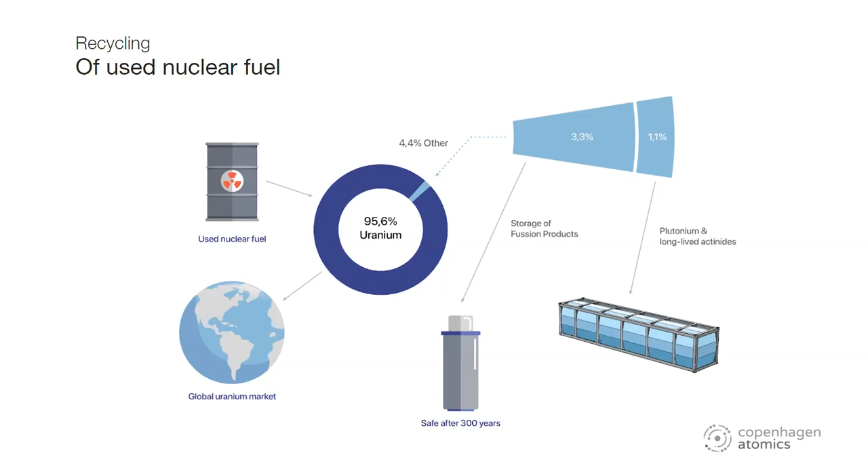Yeah. Good. Peter Smit also had a question. Why has waste from thorium a much shorter life than from a light water reactor? Yeah, so it has to do with this. I'll just go up a little bit here. This chart here. I hope you can still see the slides. This chart here shows the different routes that

when you have neutrons that interact with the atoms in a nuclear reactor, those atoms are converted to other atoms. This is what a nuclear reactor does, whether it's a fusion or a fission reactor. And this particular calculation I showed here is for a thorium reactor. But if you do the same calculation for a reactor based on uranium-235, then over on the very right side there's uranium-238. This is basically the main ingredient in light water reactors. So this whole chart starts over there at uranium-238, and then it goes further out to the right and further downwards. And I haven't included those numbers in this chart because this chart is only about thorium.

But the thing is that when you have these neutrons interact with your uranium-238 and also the subsequent elements that are created from that, you create some of these things, like you can see part of them here. Neptunium is down there, neptunium-238. There's plutonium and there's californium and all these other elements that are not found in nature. And unfortunately, they have a very long half-life. So they are radioactive for tens of thousands or even 100,000 years.

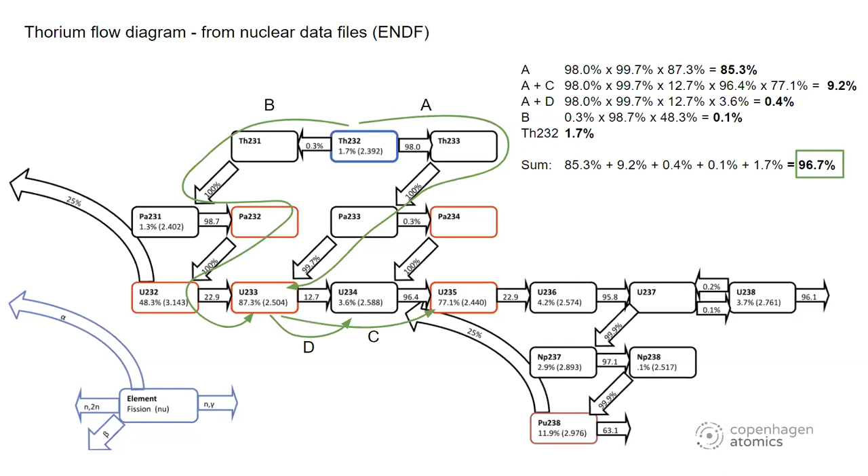One thing I like when I have talked to Thomas Jam, but also others, is if you look at a light water reactor, it takes decades to build now, but when we designed it, if you look in the past, in 3-4 years a light water reactor in the 60s was developed and deployed. So there's also other reasons, I think, but Thomas Jam can very well allude on that.

Yeah, it's completely a question about human perception. It's not really about engineering. Like you said, if we go back to some of the very first reactors that were ever built in this world, one of the first ones is the Hanford B reactor at the Hanford site in the state of Washington in the USA, and it's now a museum. So everybody can go there and have a look. If you're interested in nuclear reactors, it will be a great experience, because that's one of the very first reactors they built.

And they were not able to do any computer simulations back then. Of course, they did some calculations on a blackboard before they built it to know what size it should have. And then they built it, and it took 11 months from when they started digging in the ground till the chain reaction was running. The calculations on the blackboard showed it was probably something like 250 megawatts. They had designed the cooling system for 250 megawatts, but once it was running they could see that they could easily go higher than that.

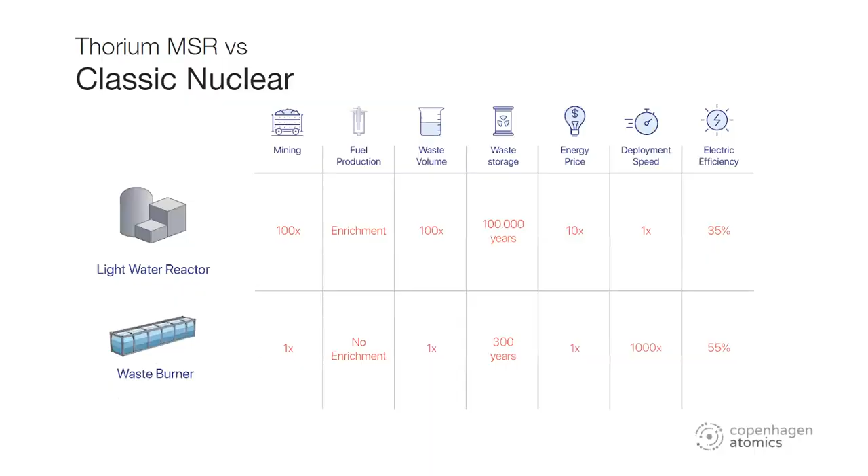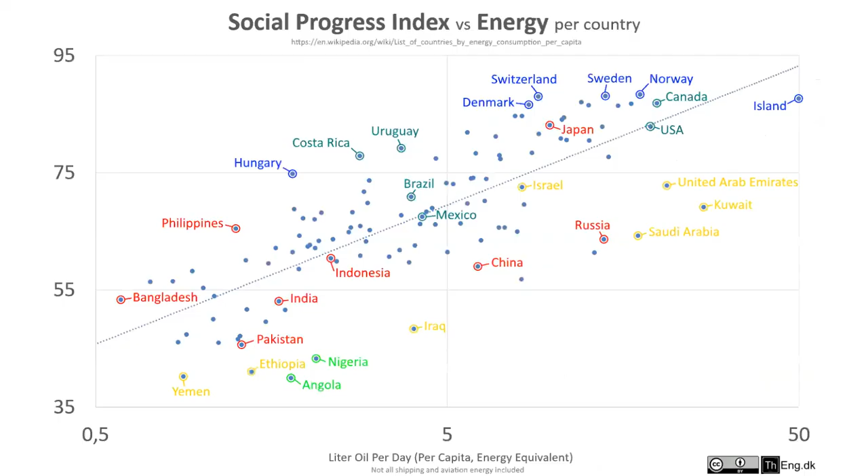And that comes back, Thomas Jam, to the slide of the double learning loop. We're busy with the issues that we know, and we're not going back to the assumptions and reimagining everything. Yeah, it's somewhere here, this slide. It's a mindset thing that we have to really crack with each other. Yes. What are really the issues?

And once I read that all the regulation is built such that if you know there's a very, very, very small chance of something and you know a solution, you have to immediately build it no matter how expensive. And that means that every year as a researcher you come up with new ideas, so every year you will have new things you have to implement.

Yeah. It's like a car: you get asked by the regulator, is there a chance that the side mirror will fall off? And the car manufacturer says, yes, there is a small chance that it'll fall off. And then the approval agent says, okay, but you cannot get the car approved until you've shown with very high reliability what the chance is that the side mirror will fall off. And it's like, but it doesn't matter, the car is still going to be safe. No, you have to prove that down to minute details. And that's one of the problems in the nuclear industry, that there's no room for reasonable thinking.

But I think it's coming back. I do believe that we have been down a road where everybody knows that what's going on is crazy, and now we sort of have to make our way back. And I see a lot of people who think these new molten salt reactors are a chance to be more realistic and do things in a more appropriate way. But of course, there's going to be a struggle, because there are still people who make money from this complicated process.

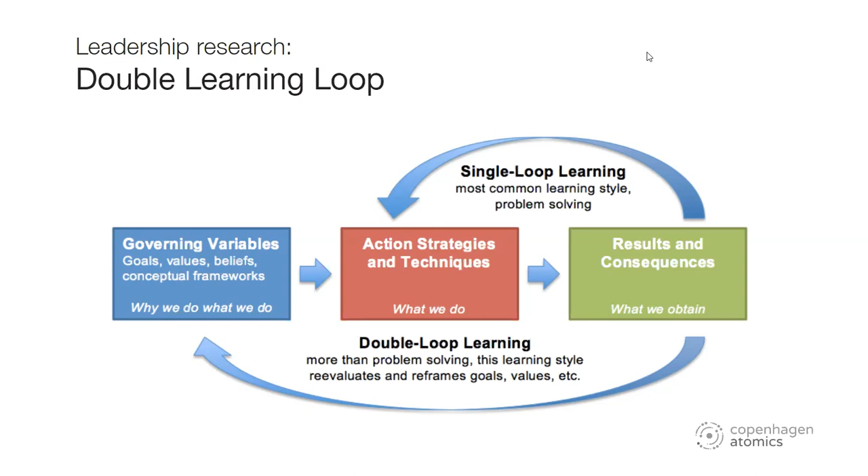I would like to thank everybody for today. I think it was very insightful, and I find it very exciting to see how you calculate it. It's 3.4 centimeters in the Netherlands for a ball of thorium. And also it was very insightful to look at different countries, where they are with their energy usage and how much thorium you need then to replace it. So that was very insightful.